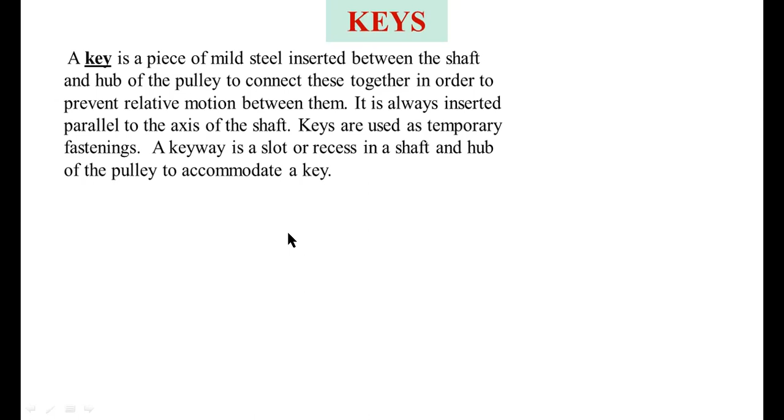So a keyway, here this is a keyway. A keyway is a slot or recess in a shaft and hub of the pulley.

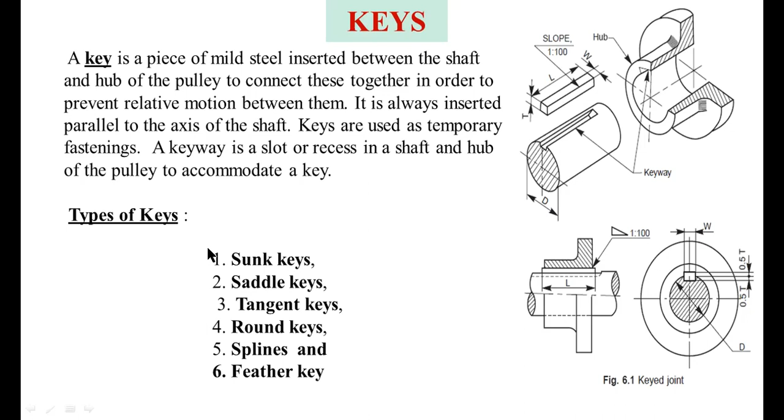Here, types of keys. I will explain about the types of keys: sunk keys, saddle keys, tangent keys, round keys, splines, feather keys. These are the different types of keys used in mechanical machineries. I will explain one by one with examples.

These are the different types of keys. This is a square key, that means the cross section of this key is in a square shape, that is width and height both are equal. This is a flat key or rectangular key, meaning width and height are both different.

Here this is a dowel or round key, also known as a round key, it is in circular cross section. And here this is a feather key. This is a woodruff key, in a half circular shape.

This is a gib head key. This is a taper key.

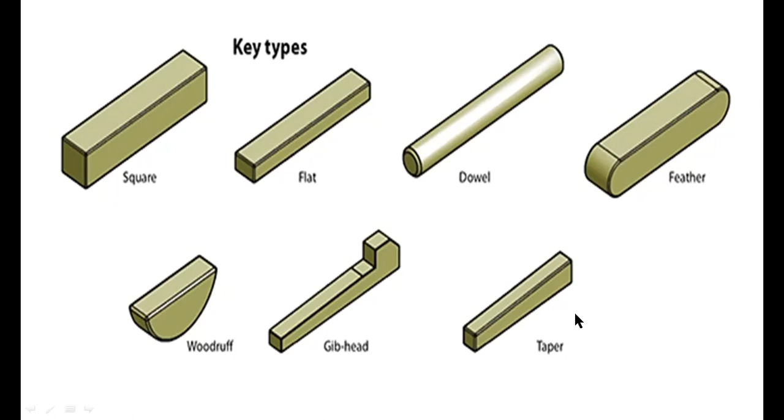Here I will show the animation of how to assemble a shaft and pulley. This is a pulley, this is a shaft. Here you can observe we are providing a key way or a groove on the shaft as well as the pulley, for inserting a key. This small piece is called a key, and it is used to prevent relative motion between the shaft and pulley.

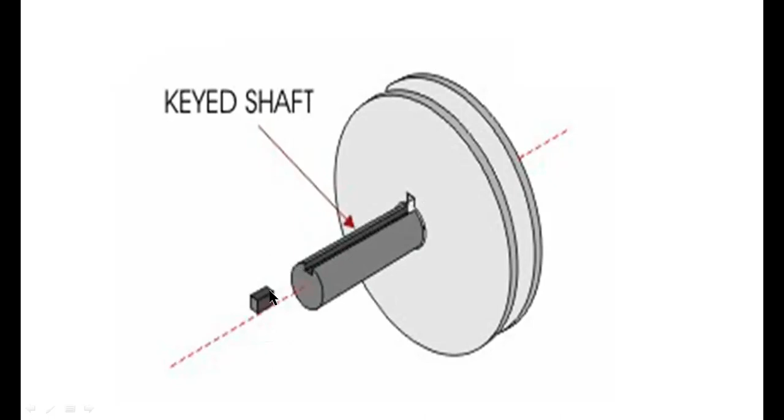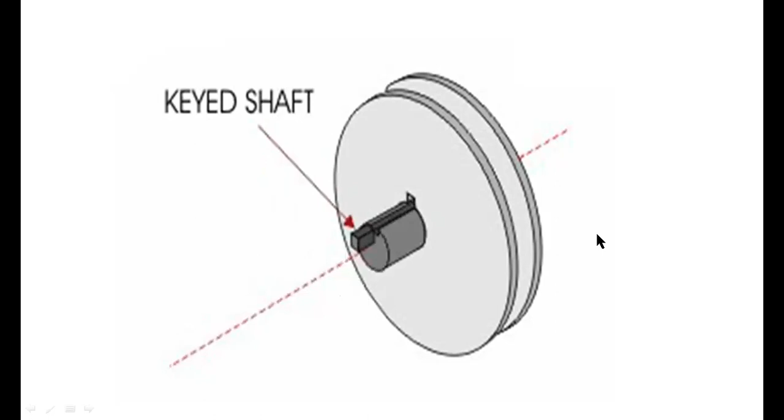So this is one example for application of keys. You can observe carefully, we are providing a key way or key slot or groove at the top of the shaft, and also a keyway on the pulley, hub, or gear. Keys are used to prevent relative motion between the shaft and pulley. We provide a keyway or recess to accommodate the key on both the shaft and pulley.

So this is another example of the key. This yellow one is a key. Here also this is a pulley or a hub.

Here you can observe this is a screw. So here the application of screw and key are both the same. These screws and keys are both used to prevent relative motion between the shaft and hubs.

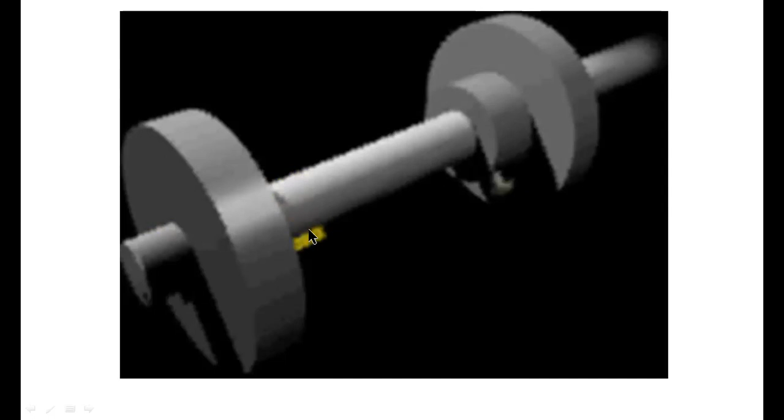So this is another example for application of keys. This is a key, this yellow color one is a key, and this is a screw. The application is the same.

This is another example. Here you can observe this is a larger pulley, this is a smaller pulley. This smaller pulley is fixed on a motor shaft. This is a motor, this is a motor shaft, and this is a rope winch. This is a driver pulley, this is a driven pulley, and this is a belt. The power is transferred from the motor shaft to the rope shaft, which is the driven pulley.

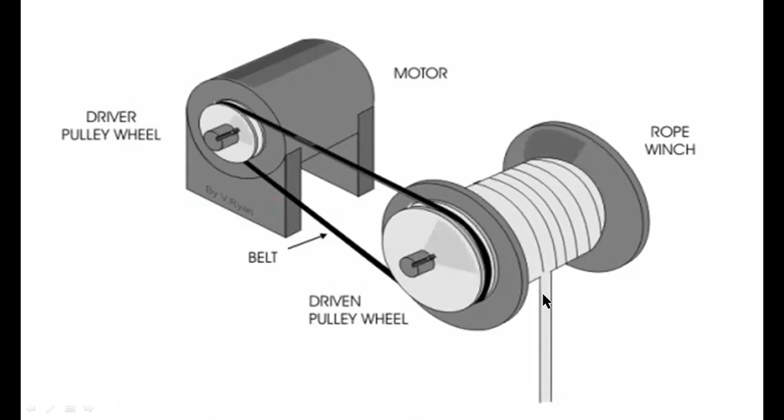Sunk keys are the standard forms of keys used in practice and may be either square or rectangular in cross section, with the end either squared or rounded. Generally, half the thickness of the key fits into the shaft keyway and the remaining half in the hub keyway.

This is a keyway. This is the total height or total thickness of the key. Half of the thickness of the key fits into the shaft keyway, and the remaining half is inserted in the hub keyway. So these keys are used for heavy duty, as the fit between the key and the shaft is positive.

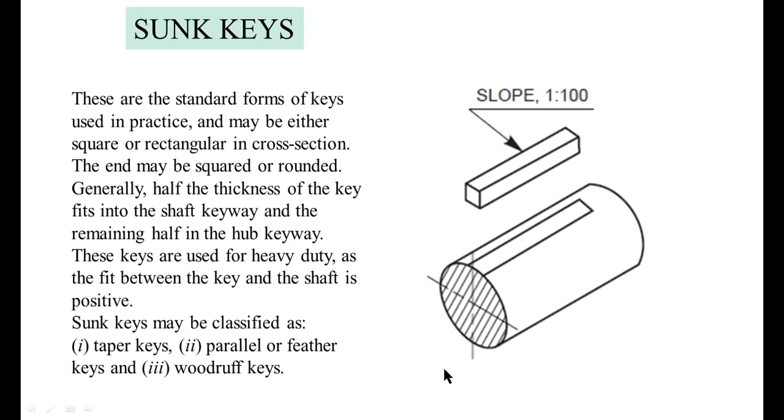Sunk keys may be classified as taper keys, parallel or feather keys, and Woodruff keys. I will show the examples.

Taper keys are square or rectangular in cross section, uniform in width but tapered in thickness.

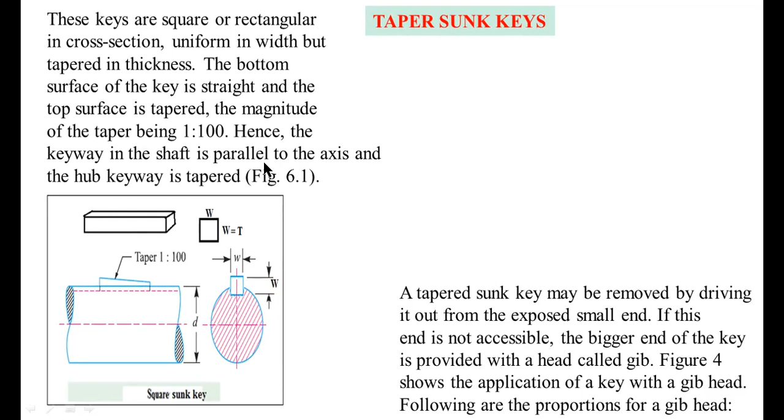This one is a rectangular key. In a rectangular key, width and thickness are different, with width higher than the thickness. This is a square key, where width and thickness are both equal. In both square and rectangular keys we are providing taper, with a ratio of 1:100.

Here you can observe this is a shaft, this is the arrangement of a keyway, and this is the side view of the shaft and key, and the front view and side view of the rectangular sunk key.

Here you can observe half of the thickness of the key inserted into the shaft keyway, and the remaining half inserted into the hub. So these two are examples of sunk keys, and two more examples are there: parallel sunk keys and gib head sunk keys.

A tapered sunk key may be removed by driving it out from the exposed small end. If this end is not accessible, the bigger end of the key is provided with a head called a gib, showing the application of a key with a gib head. Following are the proportions of a gib.

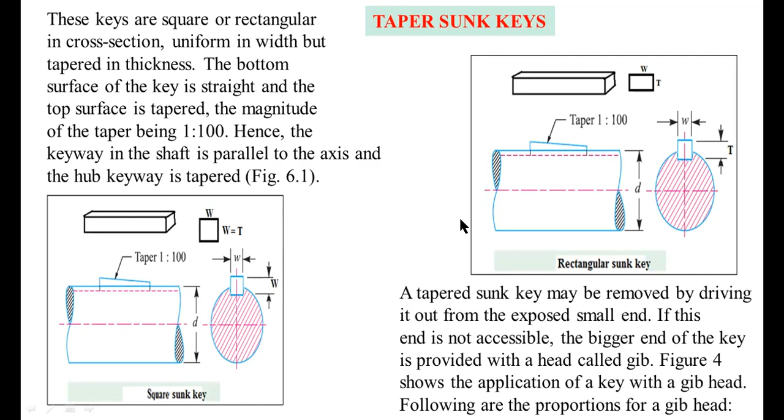So this is a parallel sunk key. In a parallel sunk key, you can observe we are not providing taper. There is no taper on the surface for parallel keys.

This is a gib head key, and this is the gib. We are providing the gib at one end of the key.

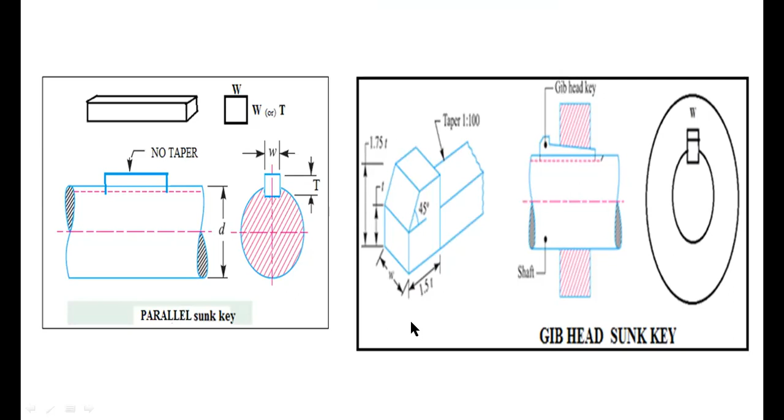So these four are the examples for taper keys. I will show the 3-dimensional figures. This is a rectangular sunk key, meaning the cross section of this key is a rectangular shape.

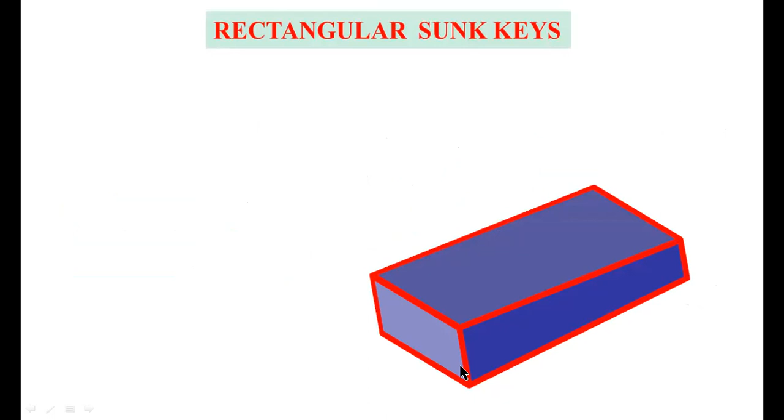Okay, this is a rectangular cross section. Here the dimensions of the key depend upon the diameter of the shaft. Capital D is the diameter of the shaft, W is the width of the key, the width of the key equals D by 4. T is the thickness of the key, that value, T equals D by 6 and W equals D by 4.

So these are the dimensions of the key. This is a rectangular sunk key. In a rectangular sunk key, the cross section of the key is a rectangle. I will show the front view and side view of the sunk key.

This is the side view. If you are observing from this side, you have to draw these dimensions. So this horizontal length is the width, and this height is called the thickness or height of the key. The dimension width W equals D by 4 and the thickness T equals D by 6. Here always width is greater than the height or thickness, W greater than T.

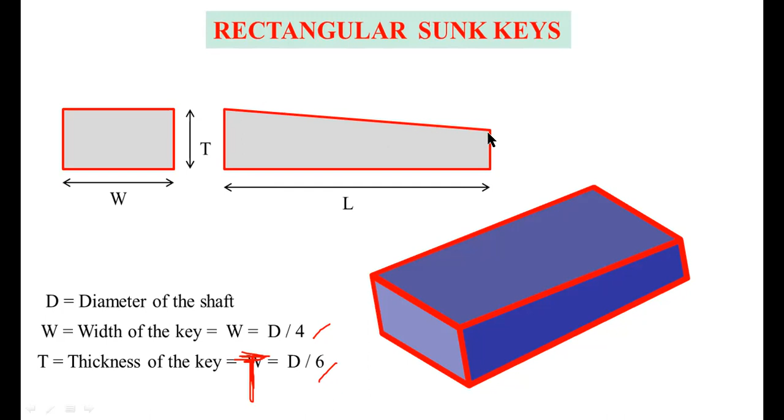After drawing the side view, you have to draw a horizontal line of length L. Take a suitable length, there is no standard value. Now draw a vertical line equal to T. Now draw a vertical line at the right end, but the height of this left side end is not equal to the right side end, so you have to provide a taper.

That is a 1:100 ratio taper. That means for a 100 mm length, you have to decrease the height by 1 mm on the right side. That is the main meaning of taper 1:100 - for each 100 mm length, you decrease the height by 1 mm. You have to provide the taper at one side only, at the top surface only. There is no need to provide a taper on both sides, only one side taper at 1:100 ratio.

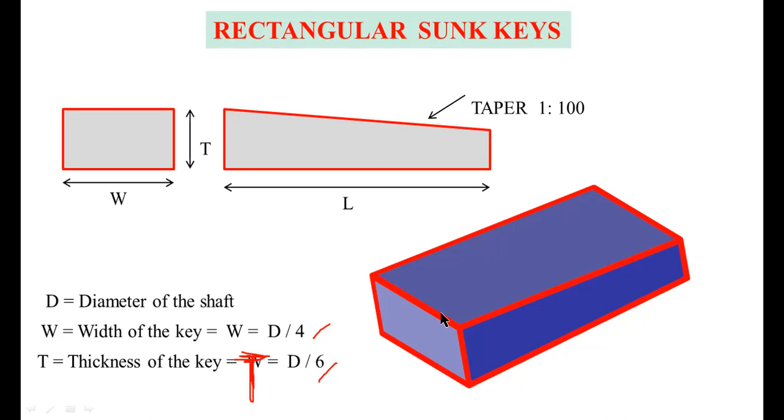So this is the construction of a rectangular sunk key. This is the isometric view of a sunk key, the rectangular sunk key. The second type is a square sunk key, this is the shape of a square sunk key. This is an isometric view, the isometric view of a sunk key.

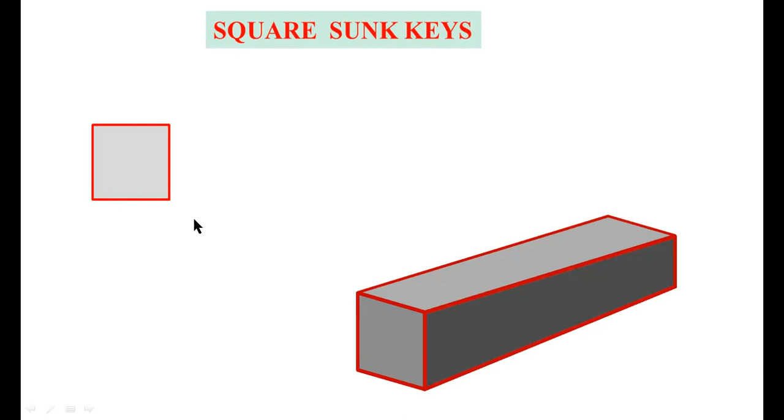This surface is the side view. First of all you have to draw a side view. For a square sunk key, you have to provide W horizontal and W height. Here the width and the thickness are also equal to W, so you have to provide width and height both equal, that value equals W, which is D by 4.

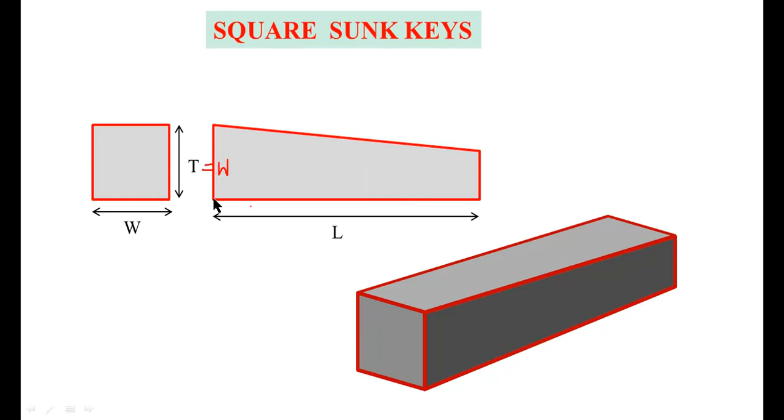So after getting the side view, now you have to start with the horizontal line. You have to draw a horizontal line, that value equals length L. After that you have to draw a vertical line at the left side end, this value equals W.

Now you have to provide a 1:100 ratio for this right side end. For each 100 mm length, you have to reduce the height by 1 mm. After that, you have to join this inclined line.

So this is the front view and side view of the square sunk key. This is the isometric view of a square sunk key.

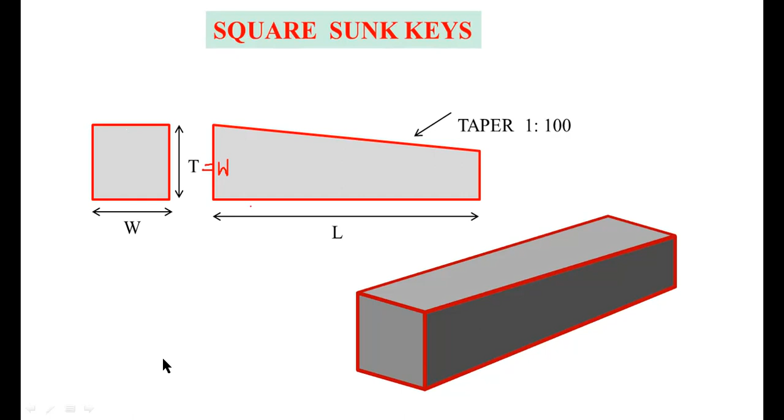Now the third model is parallel sunk key. In parallel sunk key, we are not providing a taper. That is the main difference between parallel sunk key, square sunk key, and rectangular sunk key.

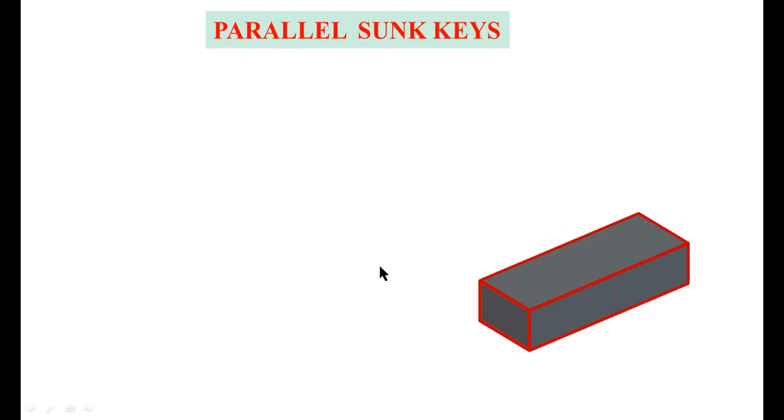The cross section of the parallel sunk key depends upon our requirement. The cross section may be square or rectangle. There is no standard shape, it may be square or rectangle, but there is no taper.

Now the fourth one is gib head sunk keys. So this is the isometric view of the gib head sunk key. This is another view of the gib head sunk key.

Now for drawing the front view and side view, first you have to draw this face, that is the front view. Start with the front view. The dimensions are: this one is the length, this horizontal line equal to the length of the key, take a suitable length. Then you have to take this vertical line as the height or thickness of the key. This thickness t equals d by 6.

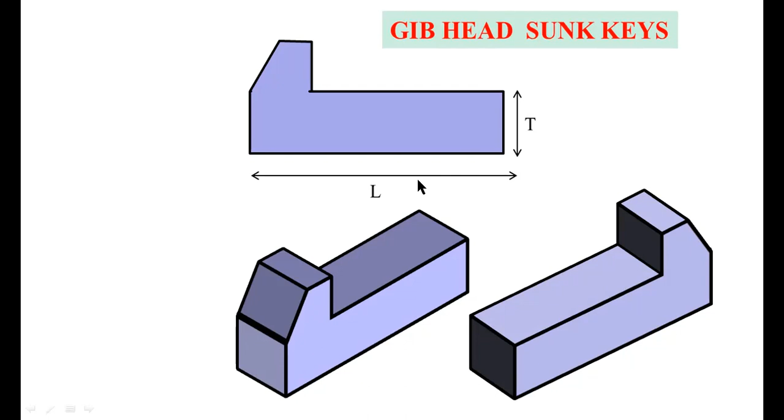Then here, this height equals 0.75t. So the total height of this gib head key equals t plus 0.75t, that is 1.75t is the total height of the gib head key. So this is 0.75t, and take this one also as value t. Here you have to consider an angle of 45 degrees.

Now this is the side view. This is a bottom rectangle, these dimensions are width w and height t. So width w is the width of the key. Now from here to here is thickness. Now this one is 0.75t. So this is the shape of a gib head key.

These two are the isometric views. These two are the front view and side views.

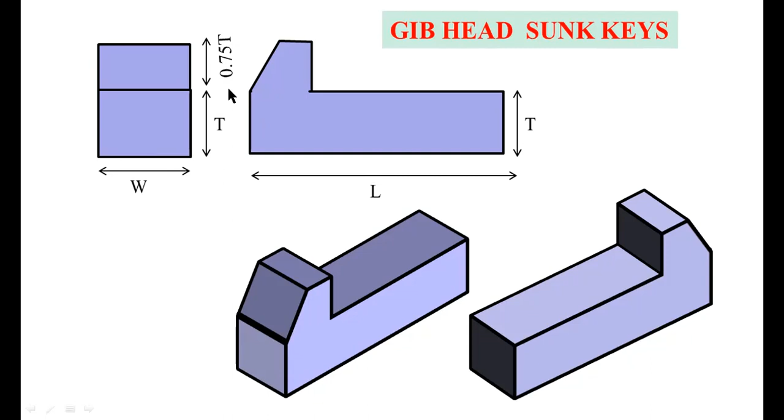Woodruff key is a special purpose key. It is also a sunk key in the form of a segment of a circular disc, of uniform thickness. As the bottom surface of the key is circular, the keyway in the shaft is in the form of a circular recess to the same curvature as the key. The keyway is made in the hub of the mounting in the usual manner.

Woodruff key is mainly used on taper shafts of machine tools and automobiles. Once placed in position, the key tilts and aligns itself on the tapered shaft.

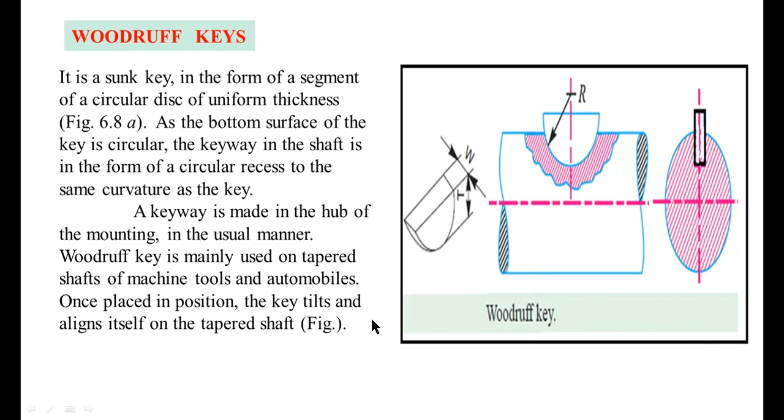Now this is the isometric view of the woodruff key. This is also another view of a woodruff key.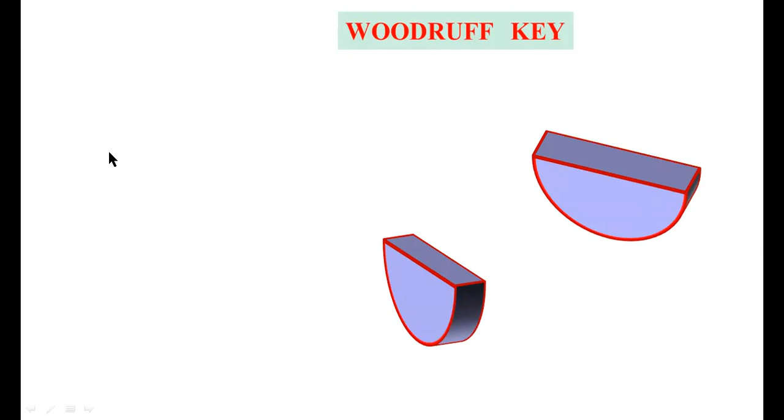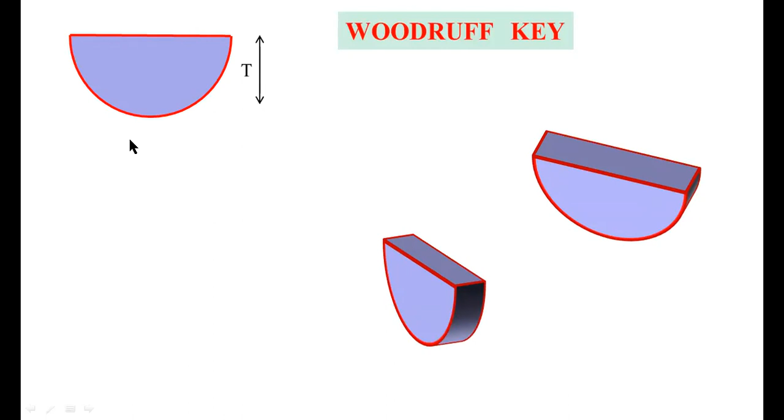So first you have to draw the front view of this key. This is a semicircular shape, so first you draw a semicircular shape. Then after this is the thickness, and this is the length. This horizontal line is the length of the woodruff key, and this is the width of the key. You can observe here, this is the width, this is the length, and this is the height. So these are the dimensions.

This is a front view, this is a top view. This is a top view, this is the front view.

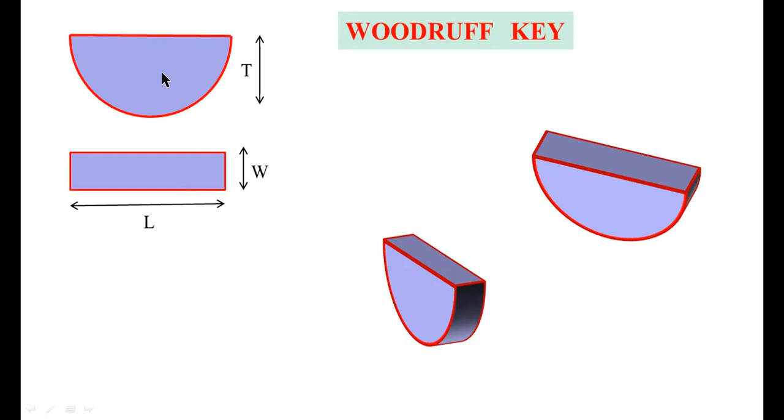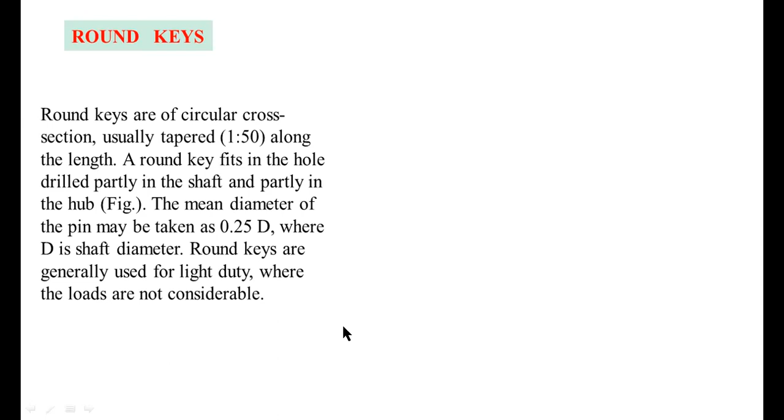Round keys. Round keys are of circular cross-section, usually tapered 1:50 along the length. A round key fits in the hole, drilled partially in the shaft and partially in the hub. The mean diameter of the pin may be taken as 0.25 D, where capital D is the shaft diameter. Round keys are generally used for light duty, where the loads are not considerable.

So this is the application of a round key. Here you can observe this is the key, round key. This outside is the hub and this is the shaft. We are providing here a circular groove for inserting the round keys. Round keys have circular cross section, meaning cylindrical shape, tapered cylindrical shape. So here also we are providing a taper circular groove for inserting the key. The taper is 1:50 ratio.

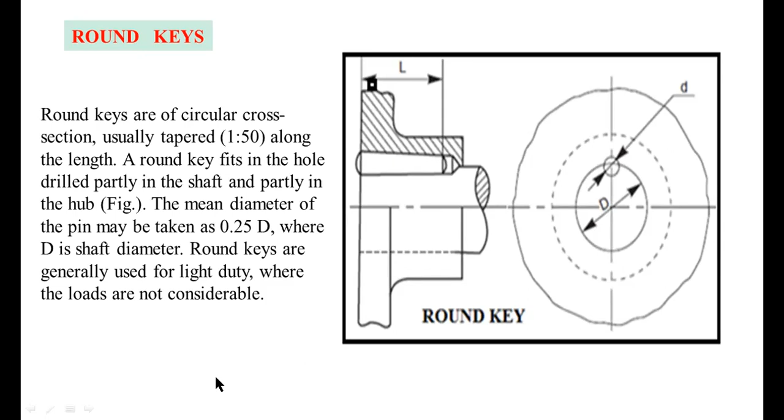I will show the three-dimensional view. This is the isometric view of the round key. Here the diameter of this round key on the left side is bigger than the right side. This is a small end, this is a big end. This is also another view.

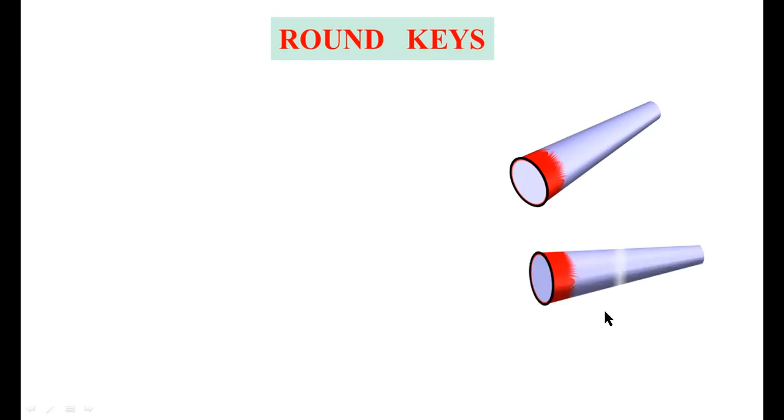So first you have to draw the front view of this round key. This front view looks like this. This is a taper, here we have to draw a taper on both sides. This is a big circle, this is a small circle. This is the length of the key.

As already discussed previously, the length of the key mainly depends upon the application, so there is no standard equation for length. This is the diameter.

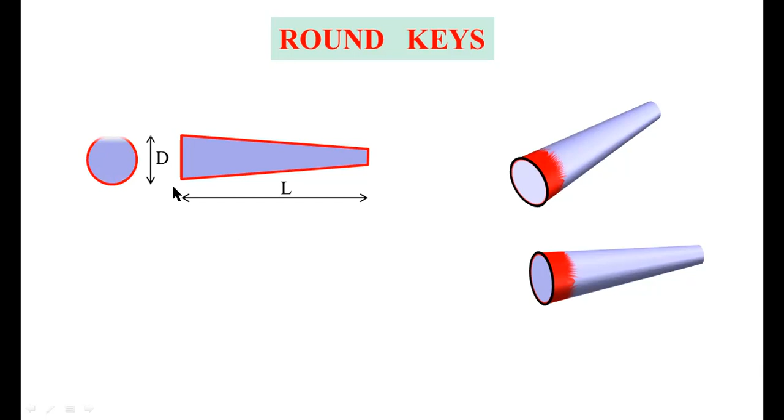Feather keys. A parallel or feather key is a sunk key uniform in width and thickness, as well as uniform width and thickness. There is no taper. These keys are used when parts like gears and clutches are mounted or required to slide along the shaft, permitting relative axial movement. To achieve this, a clearance fit must exist between the key and the keyway in which it slides.

The feather key may be fitted into the keyway provided on the shaft by two or more screws, or into the hub of the mating member.

These keys are of three types: peg feather key, single headed feather key, double headed feather key.

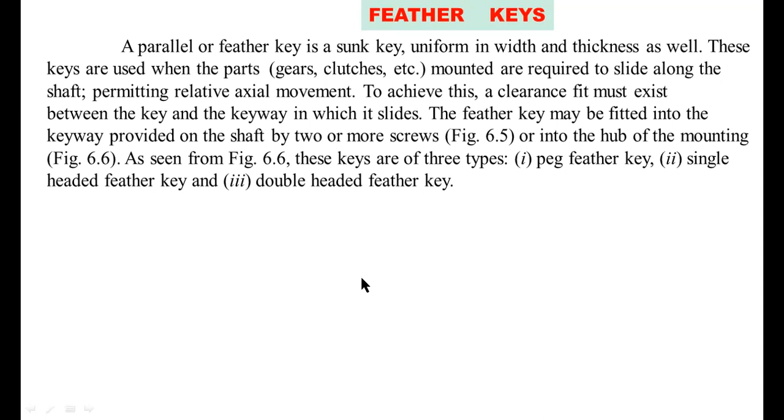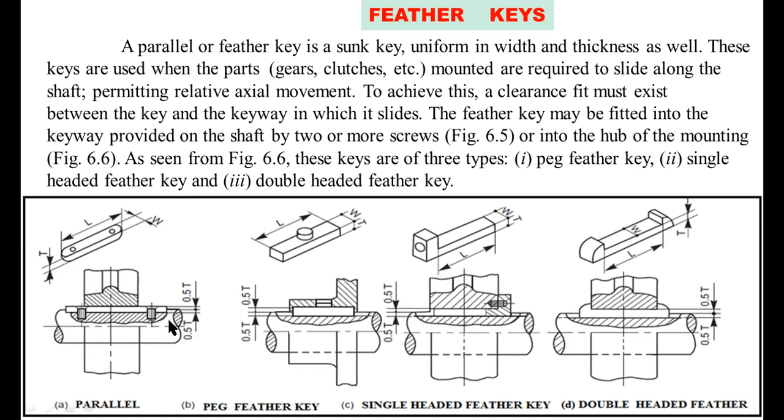Okay, I will show one by one with example. The first one is peg feather key. So this is the isometric view of the peg feather key. This is a rectangular key. So at the top of the rectangular key we are providing a round small cylindrical key. Okay, this is a small cylinder on the top of the rectangular key.

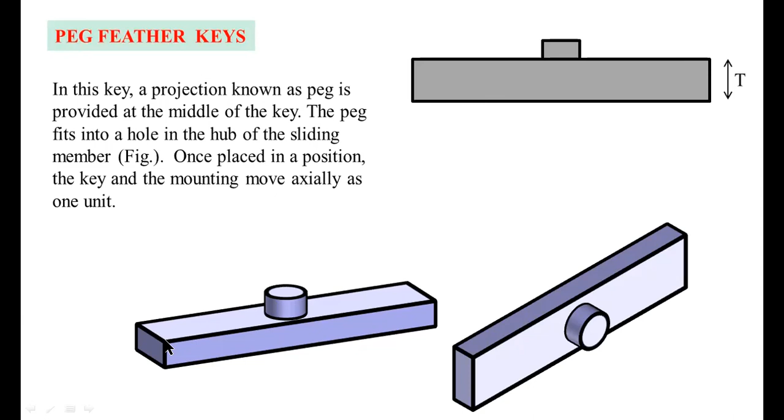So this is another way. Here this is the front view. If you are observing from this side, you have to draw this small rectangle. That is the height, this is the height or thickness, and this one is the length, the horizontal length.

Now if you are observing from the top of this figure, it looks like here, this is the top view, also rectangle. This is the width, this is the length. If you are observing from the top, this peg looks like a circle. If you are observing from front view, then this peg looks like a rectangle. So this is the front view and top view of the peg feather key.

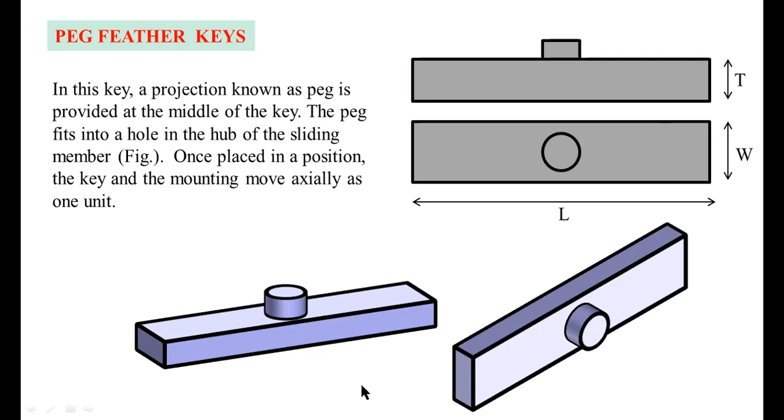These two are the isometric views. Now single-headed feather key. In this single-headed feather key, the key is provided with a head at one end. The head is screwed to the hub of the part mounted on the shaft.

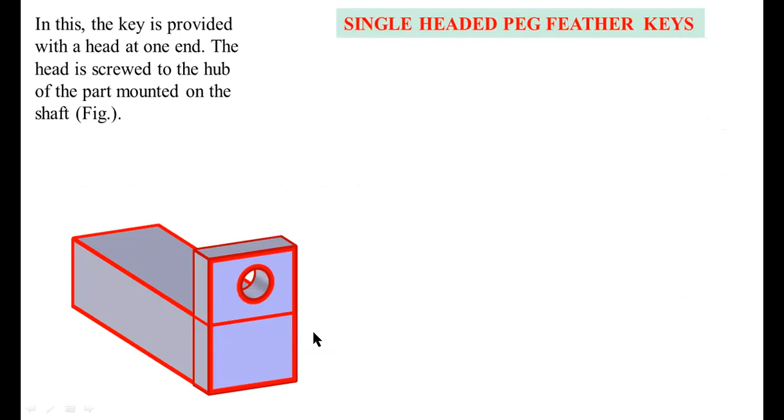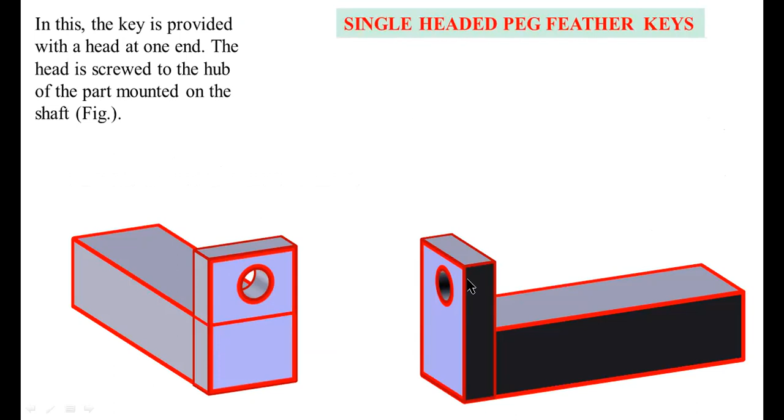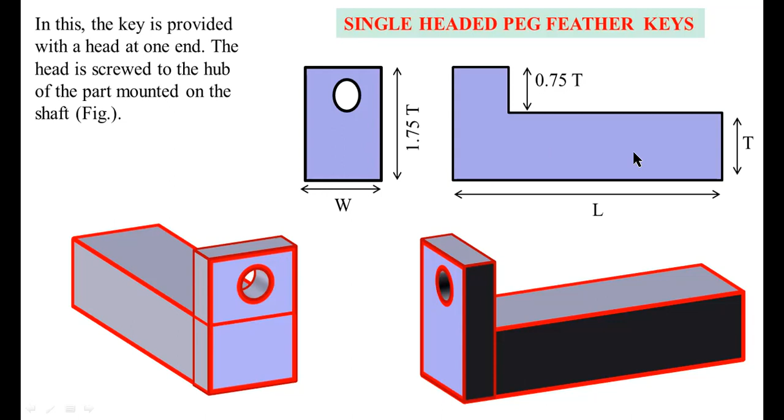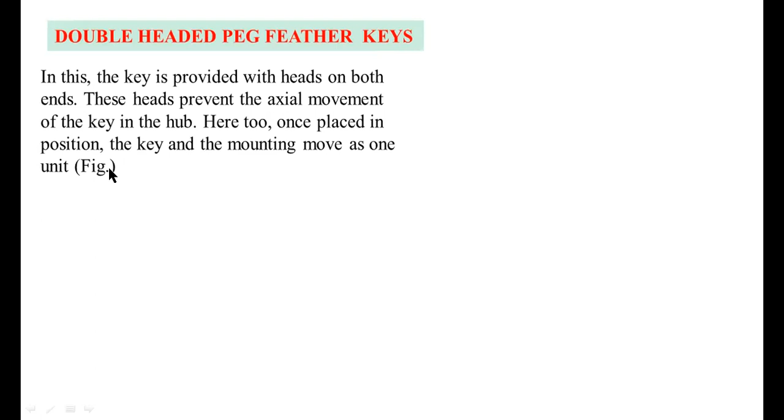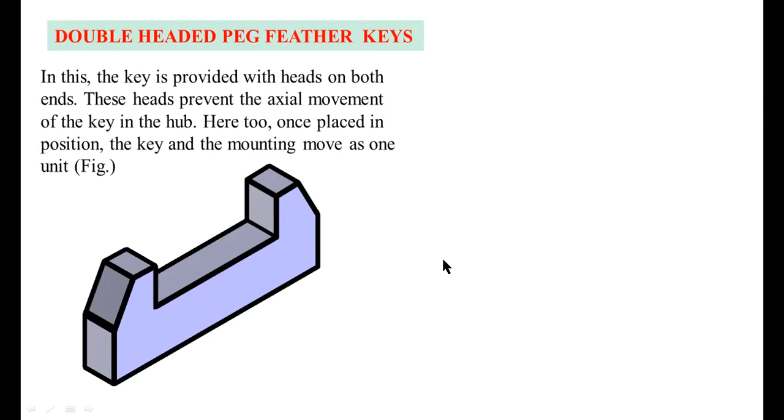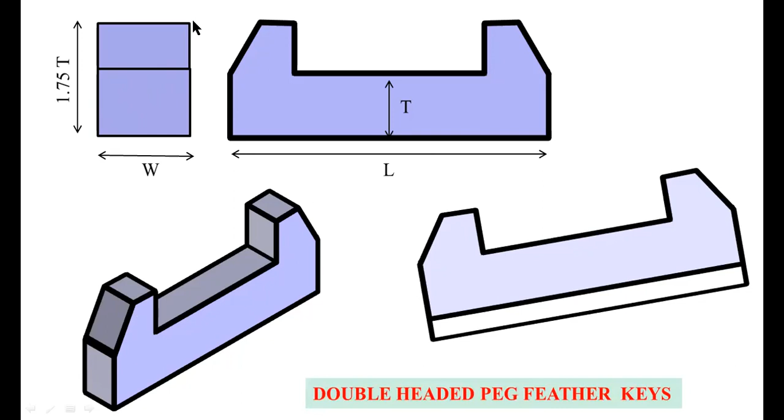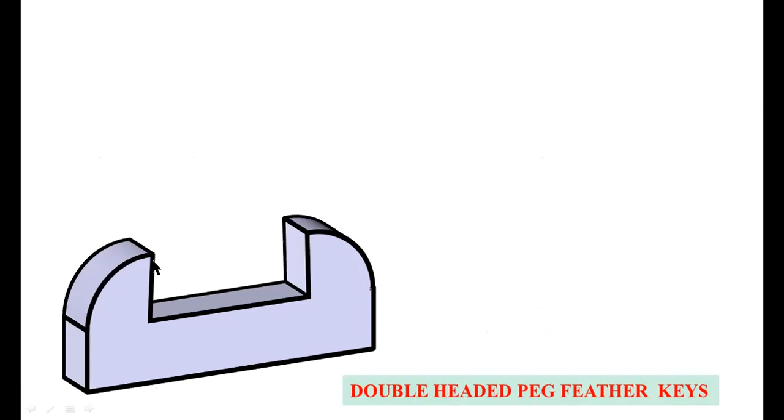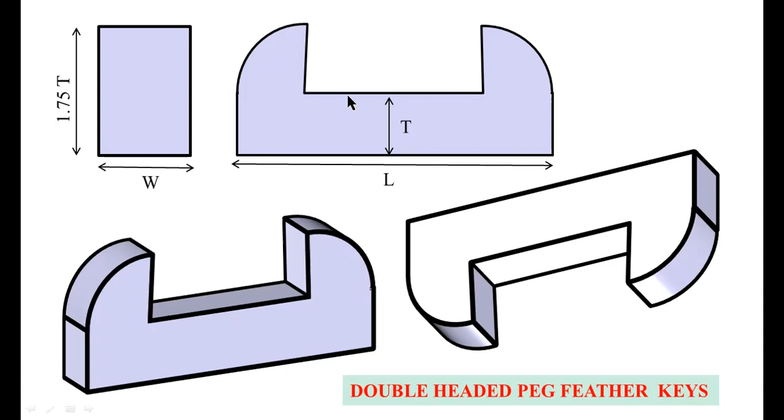This is also a double-headed feather key. The main difference is it is in curved shape. So these are the front views and side views. Here, if you are observing from this side, this entire surface looks like a single rectangle, that's why I am drawing a single rectangle. The total height of this feather key equal to 1.75 T, and this is the width. So these are the front views and side views of the double-headed feather key.

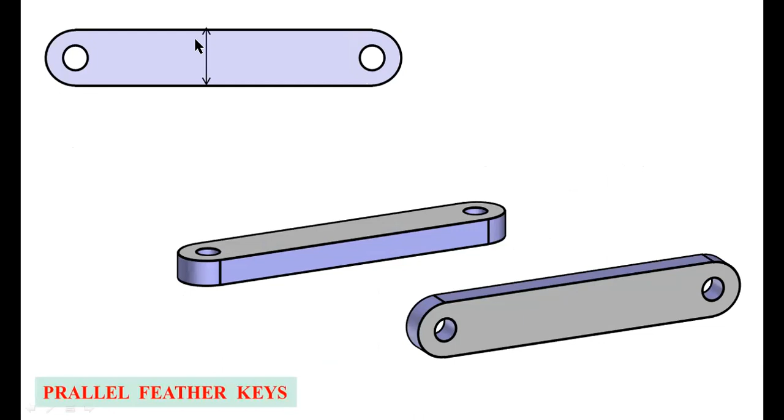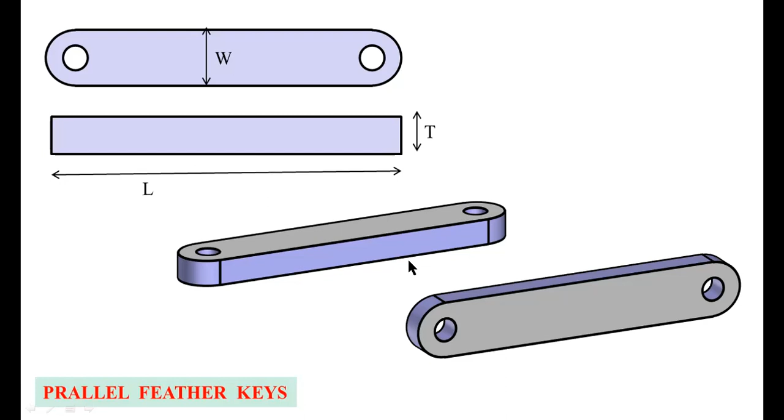This is the front view. If you are observing from this side, the front view of this parallel feather key looks like this. This is the width and this is the length. This is the length and this is the thickness of the key.

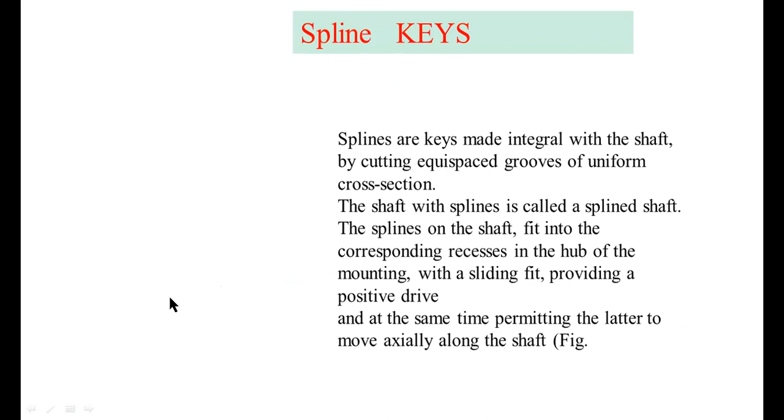Another key is the spline key. Splines are keys made integral with the shaft by cutting equispaced grooves of uniform cross section. The shaft with the splines is called a spline shaft. The splines on the shaft fit into the corresponding recess in the hub of the mounting with a sliding fit, providing a positive drive and at the same time permitting the hub to move axially along the shaft.

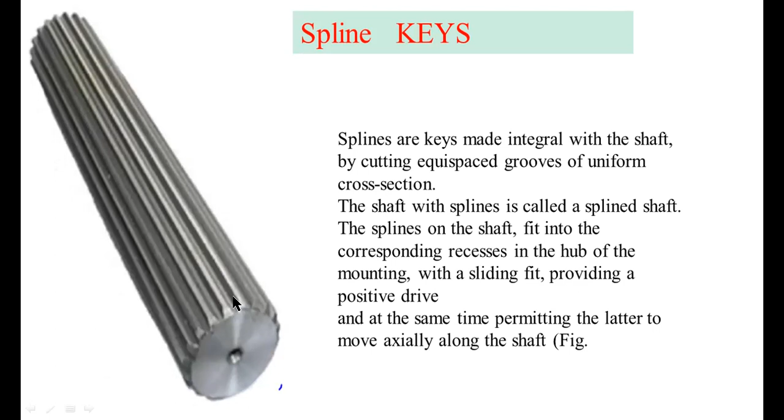So this is another view. This is a spline shaft. This is the side view of the spline shaft. It looks like a gear.

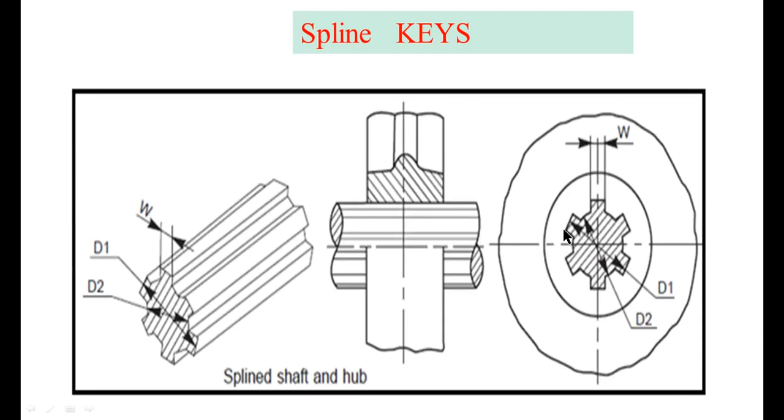Saddle keys are taper keys with uniform width but tapering in thickness on the upper side. The magnitude of the taper provided is 1:100. These are made in two forms: a hollow saddle key and a flat saddle key.

In sunk keys we are providing keyway on the shaft and in the hub. But in saddle keys, for fastening the saddle key we are providing keyway in the hub only. We are not providing keyway on the shaft.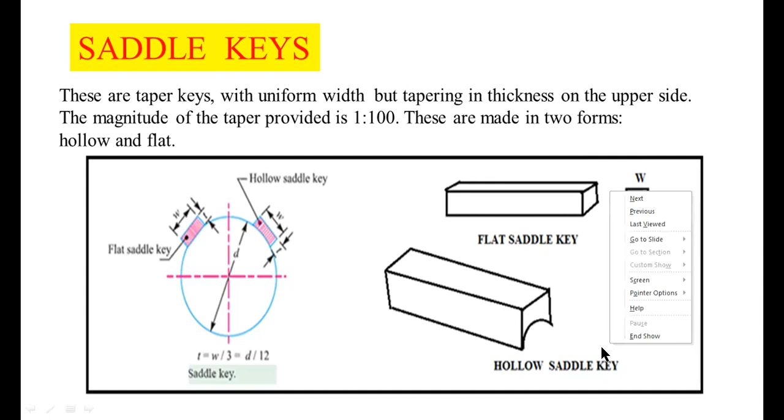So this is the shape of the hollow saddle key. A hollow saddle key has a concave shape at the bottom to suit the curved surface of the shaft on which it is used. A keyway is made in the hub of the mounting with a tapered bottom surface. When a hollow saddle key is fitted in position, the relative motion between the shaft and the mounting is prevented due to the friction between the shaft and the key.

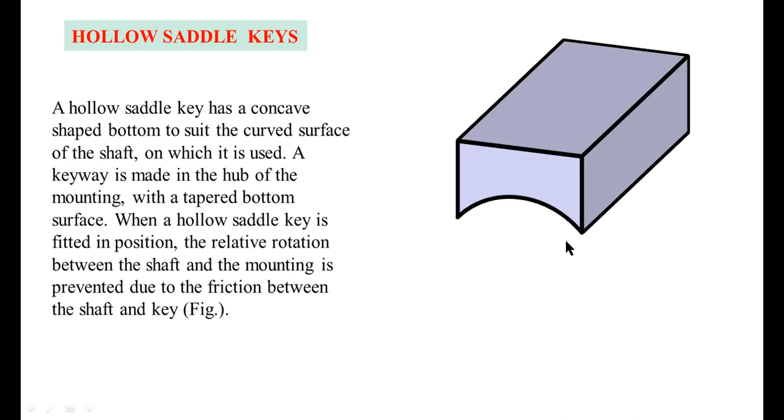So these two are the isometric views of the hollow saddle key. Now I will show the front view and side view. This is the front view. If you are observing from this side, this height and this length form the front view. This is the height or thickness, and this one is the length.

Now, if you want to draw the side view, you have to observe from this side. The shape of this side view looks like this. This is the side view. This is the width and this is the thickness.

So these two are the isometric views, and these two are the front view and side view of the hollow saddle key. This is important.

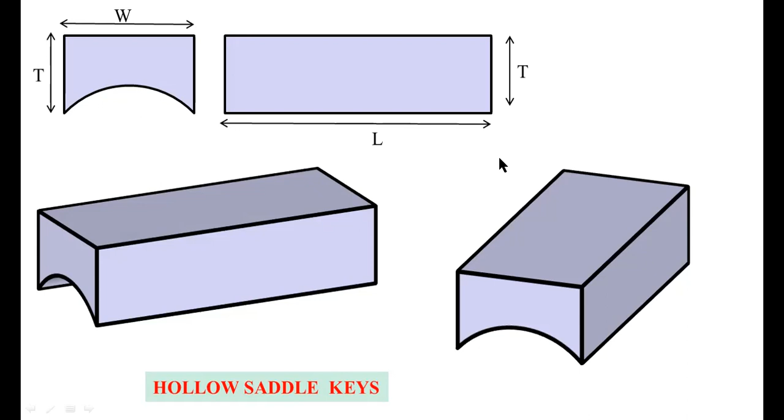Now the other one is the flat saddle key. It is similar to the hollow saddle key, but except that the bottom surface of it is flat. Apart from the tapered keyway in the hub of the mounting, a flat surface provided on the shaft is used to fit this key in position. The two types of saddle keys discussed above are suitable for light duty only. However, the flat one is slightly superior compared to the hollow type.

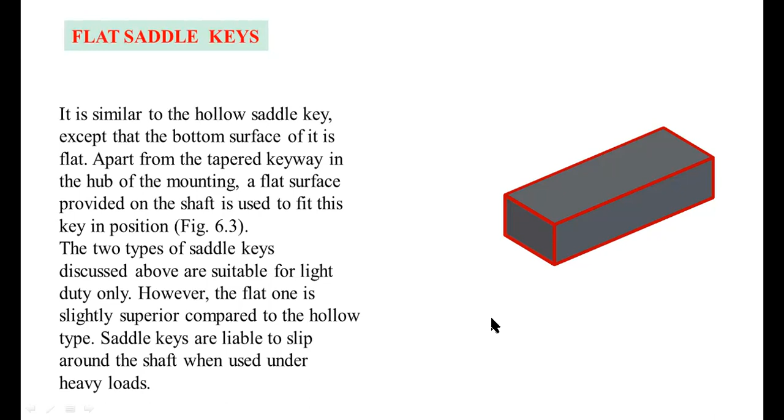Saddle keys are liable to slip around the shaft when used under heavy loads. This flat saddle key looks like a rectangular sunk key.

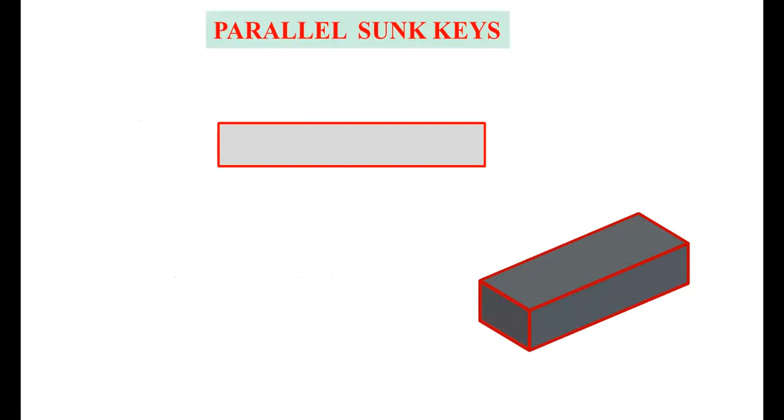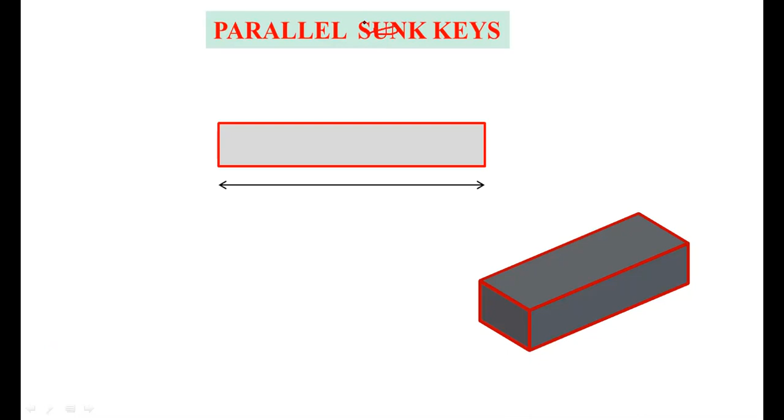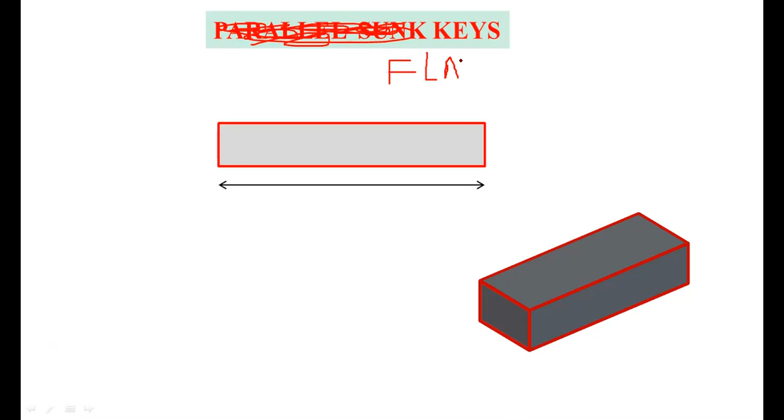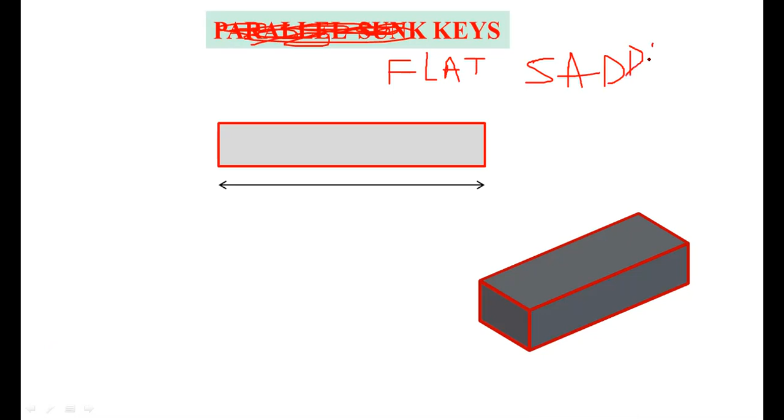This is a flat saddle key. It looks like a rectangular sunk key. The construction is the same as a rectangular sunk key.

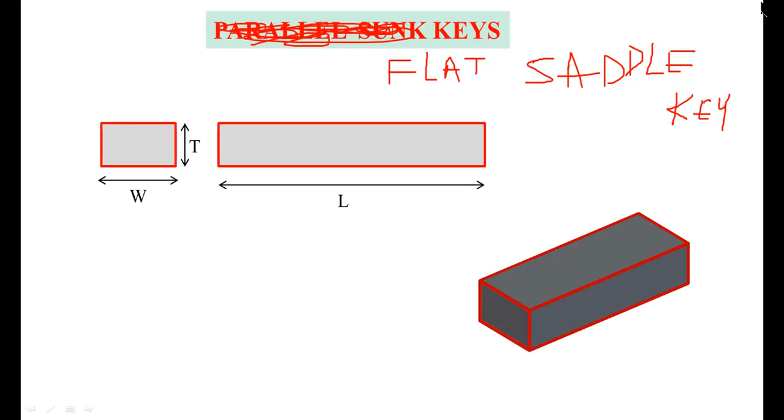Okay friends, these are the different types of keys used in our machines. So this is a complete topic. In the next class I will discuss shaft couplings, and also explain how to draw the couplings. We have different types of shaft couplings. I will discuss that later. Okay, thank you.